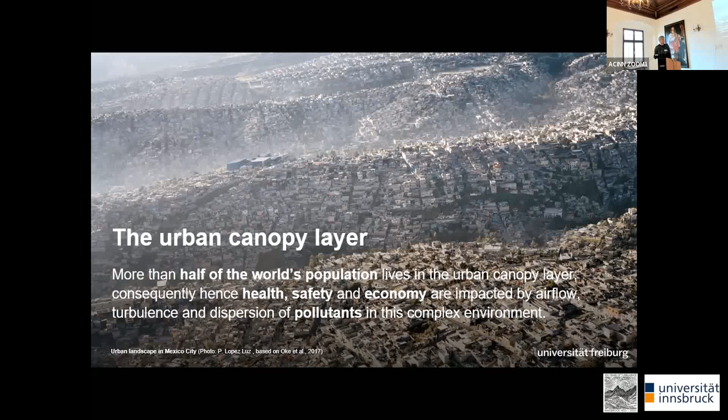I'll start with some general thoughts about the need for this research. It is clear that this is the place where we live - more than half of the world's population resides in cities. So the urban canopy layer has huge relevance for our everyday lives, for health, safety, and the economy of the world population. In particular, the dispersion of pollutants has gained a lot of attention in this context.

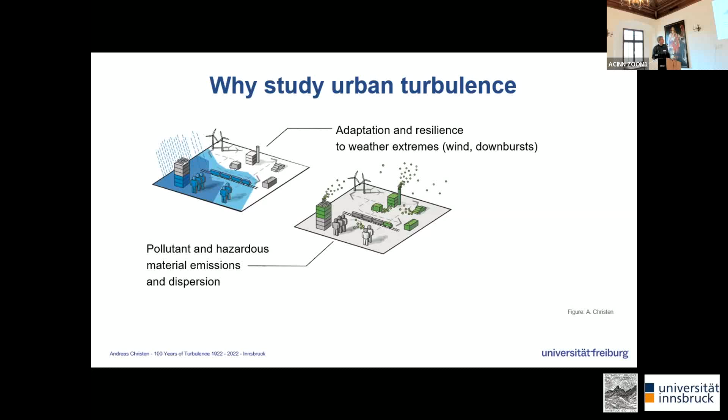But it's not only the pollutants. If we think about why we study urban turbulence in the canopy, we also have to work with weather forecasting - extreme events, winds, downbursts need to be forecast. It's not only long-term air pollutants, it's also release of dangerous materials, dispersion, but also more recently the dispersion of greenhouse gases if we want to measure greenhouse gas emissions from cities. And less relevant but still quite important is the aspect of renewable energies.

I'm not talking about bringing wind turbines into the city, I'm more talking about the energy of buildings. Marco Giometto, for example, showed that trees in the city lower wind and pressure fluctuations, and that translates to significant energy savings as well. So if we want to move towards energy conservative or energy reducing cities, we also need to think about wind.

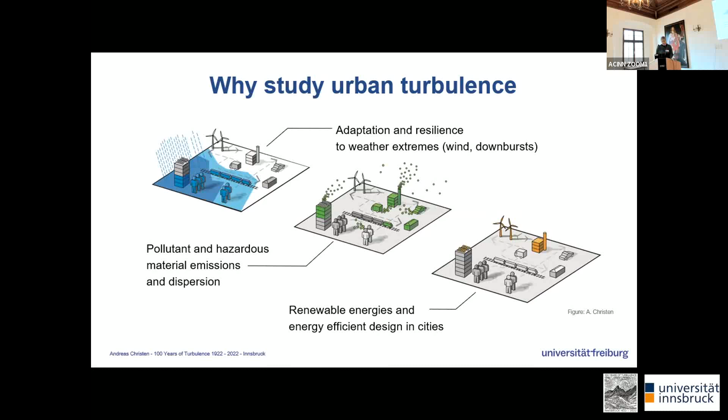A few pictures at the beginning to illustrate some particular effects we see in cities - a wonderful picture of flow over buildings. Unlike vegetation, buildings are not permeable, they are not moving in the wind, and they are very sharp edged. That means the pressure perturbations, which Ned also talked about in the averaging, are even much larger, and that changes the airflow and the turbulence, particularly in the wakes.

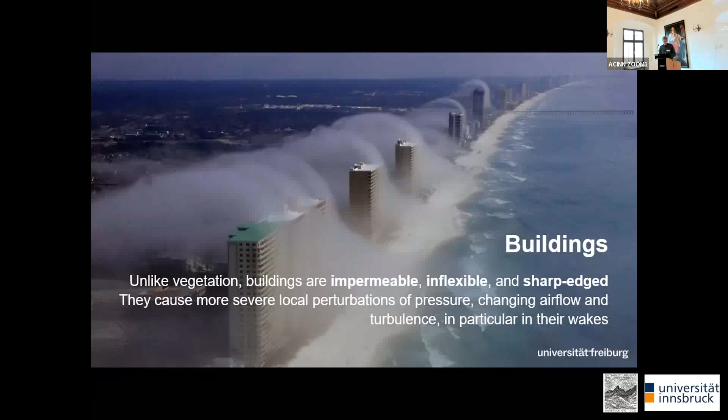But that's not the only complication. If we contrast that also to vegetation canopies, the volume occupied by buildings is substantial. If you're here in downtown Innsbruck, probably more than 50% of the space is occupied by buildings. So indoor air is decoupled from the outdoor, and the outdoor air volume decreases as we go down into a canopy, and we have to account for that in equations.

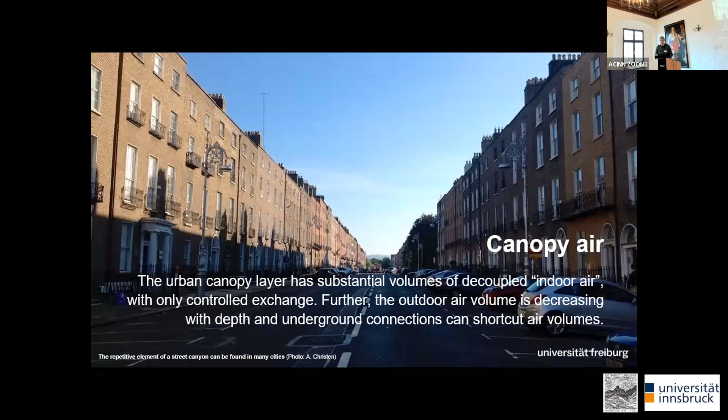Another specific aspect is the location of heat. In flat terrain, heat sources are uniform at the surface. In a forest canopy, one could argue it is the canopy top, but in a city this is greatly human influenced - there are huge emissions from chimneys and venting systems that are controlled in their timing and location by human decisions. And we, of course, can also alter this.

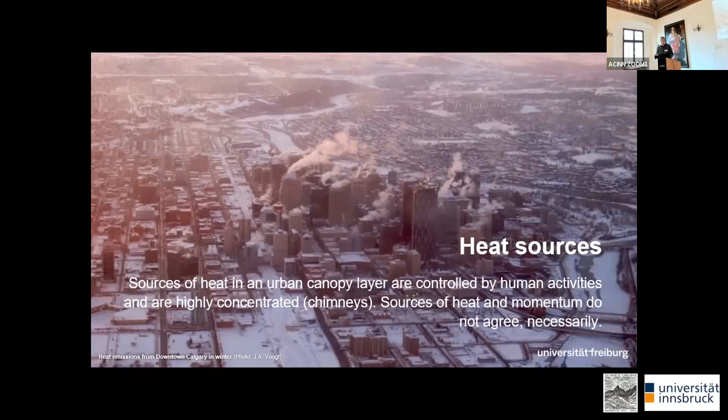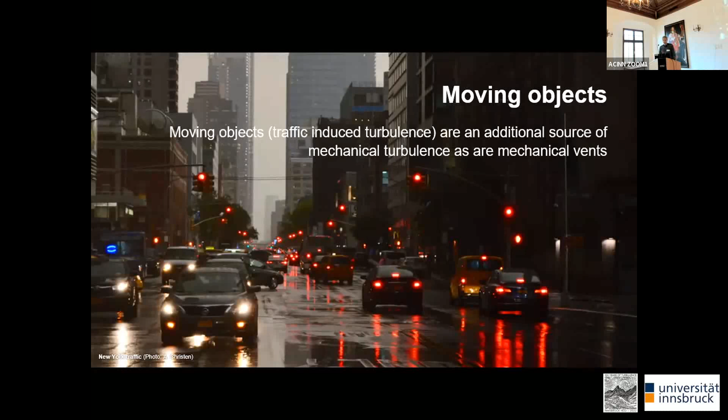Finally, I won't talk a lot about this, but it's an interesting side aspect - particularly if we go deep into street canyons where emissions occur, there are also moving objects. So the airflow is affected by those moving objects, and there have been a couple of studies looking at traffic-induced turbulence. That is something that's sometimes relevant.

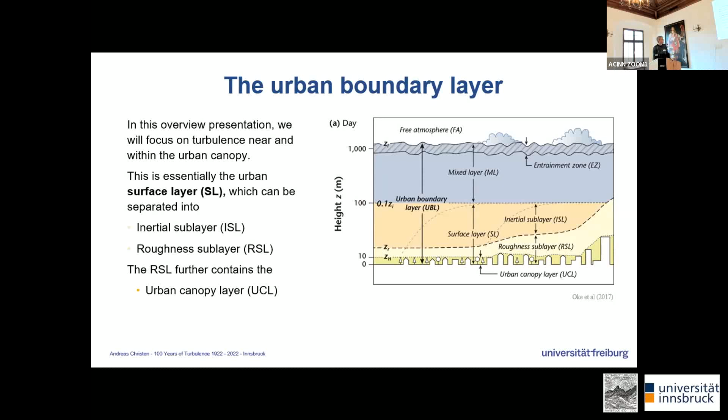So some of the dispersion models will clearly fail. Now, within the roughness sublayer, we also have the urban canopy layer, usually defined as the area from the top of the buildings down, and that's where most of us live.

Very quickly, the early work on urban turbulence mostly focused on isolated buildings and came from an engineering perspective. Without going too much into the details, airflow around isolated buildings is fairly well understood, even though it looks chaotic at first.

There has been lots of wind tunnel studies and also numerical work on some of the nice features, such as the horseshoe vortex that develops around an obstacle, which can also be seen here in Tim Oke's textbook.

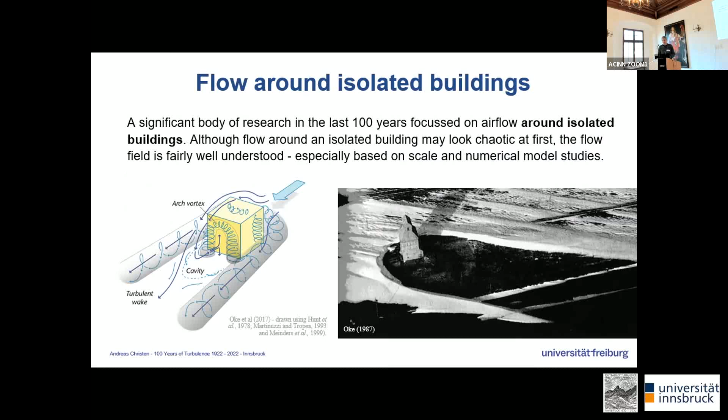Instead of focusing on those isolated buildings, a large body of work was looking at the spaces in between in cities. If there are buildings, there's also space between buildings, and this space is usually occupied, in most cultures, by streets where people move or drive and where emissions occur.

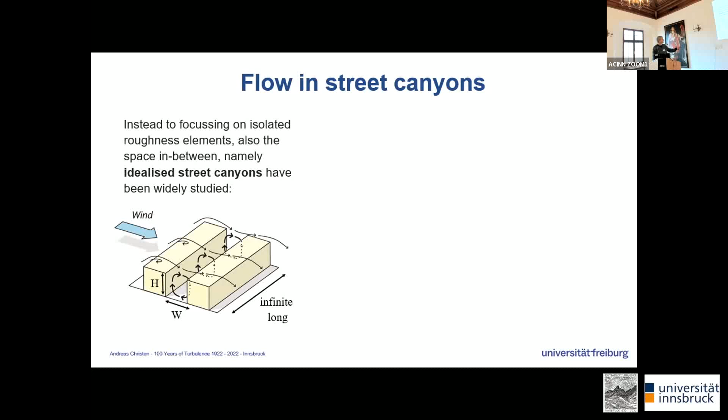So another approach is to look at street canyons as an element that's repeating over cities. Studies try to relate few length scales, for example the height of the buildings to the width of the canyon, usually studying infinite long canyons to make things easy in relation to wind and stabilities, and how this affects the venting of pollutants.

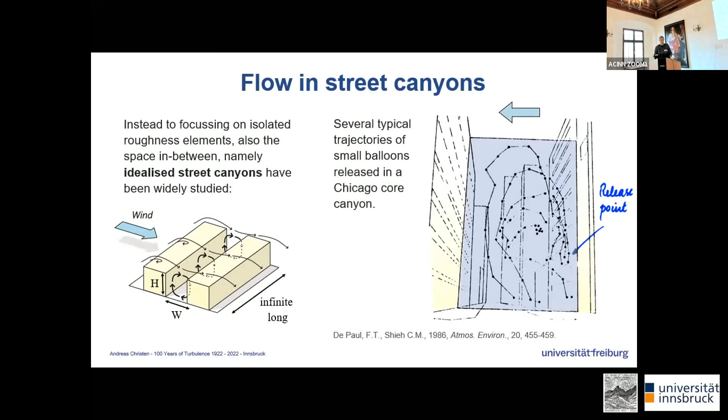That changes with the direction of the approaching flow. I'll show some more recent simulations that Marco Giometto has done for part of Basel with large eddy simulations, and although this is a complex canopy, you see some of those features.

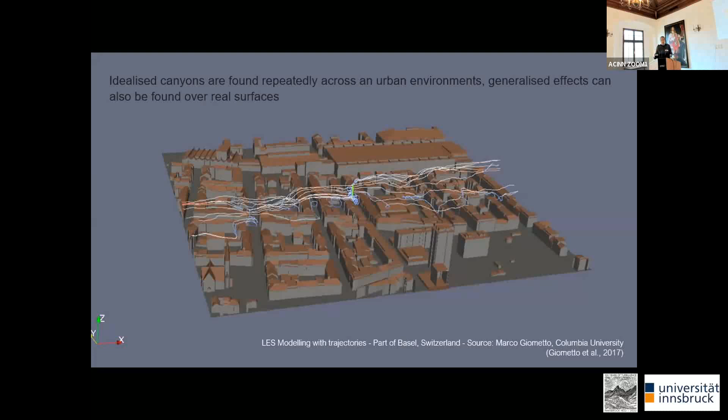So those are trajectories, and you see some of those looping movements found over and over again. So there was research on how we can parameterize this in models - how long they stay in a canyon, which of course relates to the situation.

Summarizing this work on individual elements - a city, as the last picture has shown, is more than the sum of its buildings or canyons. We really need to look at the urban scale flow interactions.

We have to deal with a realistic geometry, which is far more complex than in a forest. We cannot use one-dimensional approaches - there are many scales and degrees of freedom. It's challenging to study because we cannot measure everywhere, every place, no universality. How can we classify those surfaces?

So what the field has done, going back again to simple surfaces, is first study idealized geometries - cubical building arrays - with limited degrees of freedom, and try to figure out if we can find universal scalings in terms of spacing and density of those arrays.

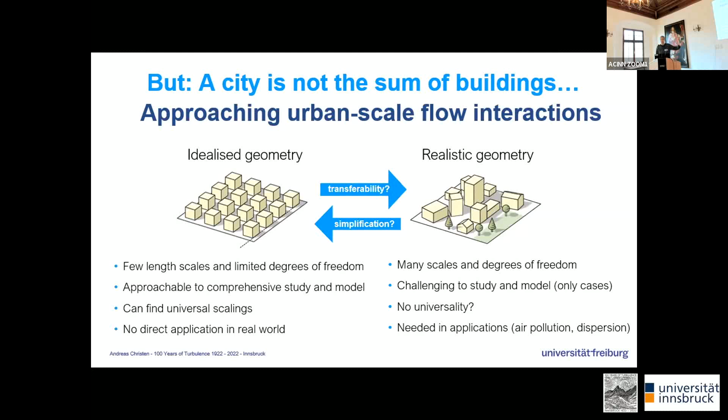Of course, the question the community has driven for a long time is: how transferable is that from a practical perspective back to reality? But I don't think it's a bad idea to make the system simpler and try to identify the most important scalings.

That leads me to a more practical part of research that was done in the last, I'd say, 50 years, looking at urban dispersion - from a health aspect perspective, from an air pollution perspective, and also for planning response actions or assessing risks, emissions from power plants or accidental releases.

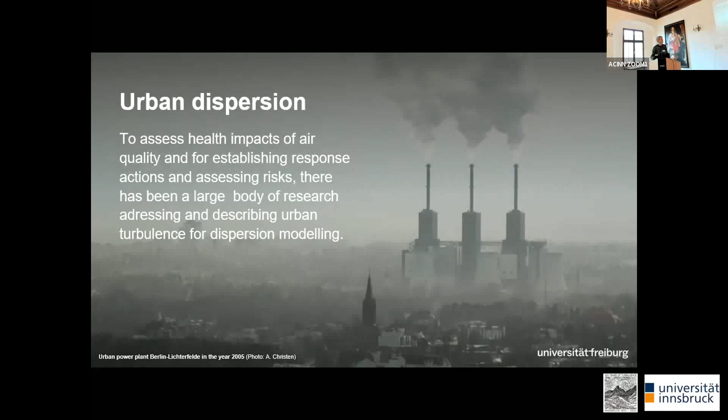A large body of research simply needs to know where a cloud of something that's been released goes and how quickly it disperses, without actually knowing too much about the underlying physics. It's good if we know something about it, but it's very practical engineering work.

Some early approaches used idealized obstacle arrays. These are some videos I was able to digitize from work done in the UK in the 1980s, where we have different arrays.

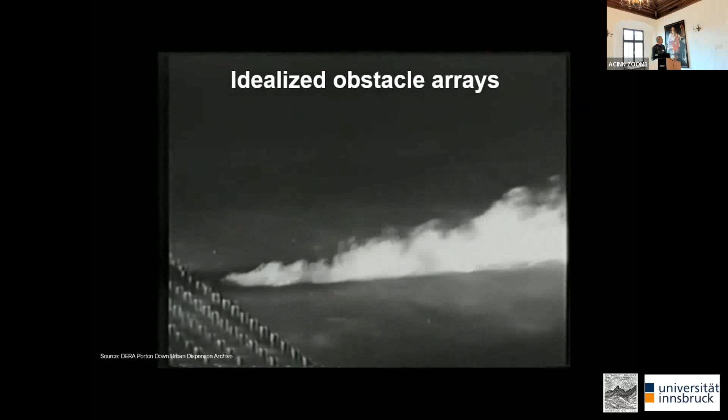So in wind tunnel simulations, you release smoke and then implement different roughness elements of different densities, and you see how this affects the flow.

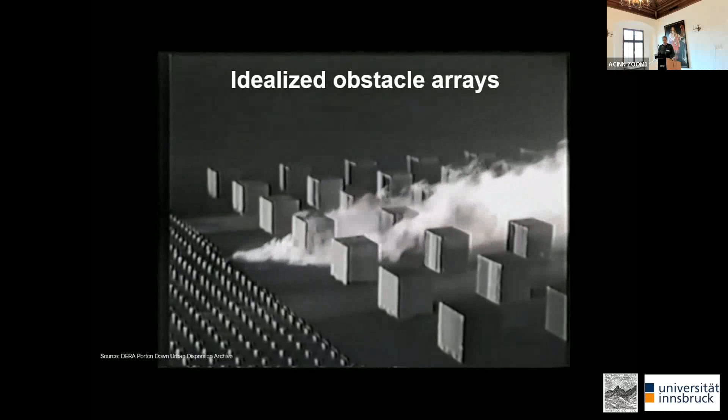First of all, the vertical mixing - the vertical transfer - is much larger, but also how is this affecting the lateral transfer? As you can imagine, in a wind tunnel, you increase the density more and more, and from those visual and measurement perspectives derive some general relationships.

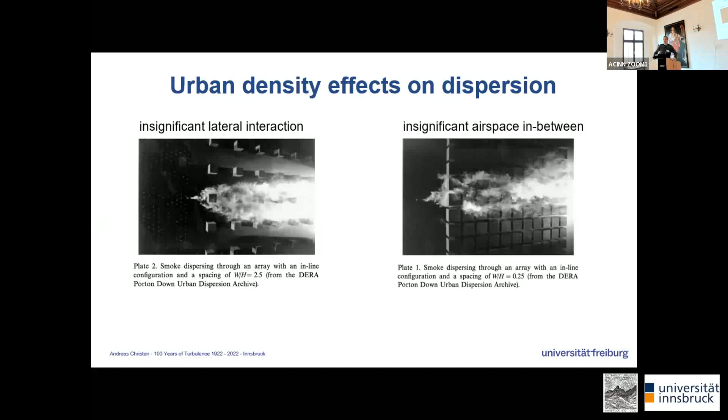One thing found in this work is if the elements are too far apart, there is no significant lateral interaction. The buildings will affect the flow but won't interact with each other. At the opposite extreme, if buildings are too close together, there is no airspace where dispersion can happen, and everything happens above roof level.

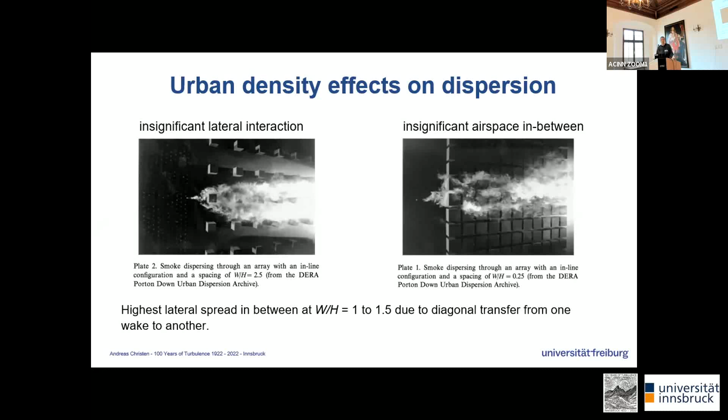So somewhere in between, there is the highest lateral spread, and that has practical implications for how we design cities, because we want to promote dispersion. Dilution is not the solution to air pollution, but it is one way of managing it. Of course, we have to tackle things at the emission scale.

This work led to the recognition that there are different flow regimes. These can be described by individual roughness elements and the flow around a building, where the flow is readjusted to the conditions upstream before the next element is encountered. That would be isolated roughness flow. It's not really relevant for cities because usually buildings are closer, but in some cases that's the case.

Then we have wake interference flow, where the wake of one building really impacts the next building, causing a lot of mixing and lateral spread. And then, if the buildings are even closer, the space in between becomes enclosed and increasingly decoupled from above. From an air pollution perspective, that's not a situation we would like to favor.

But that's not the only thing. It might suggest it's only about density, but it also depends on the alignment. Studies have been done with staggered arrays versus aligned arrays, and if you change the height of the buildings to being more random, that has a great influence.

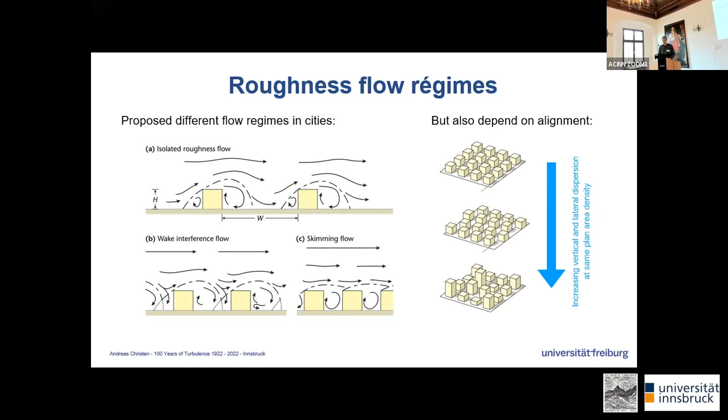This should indicate that as we move from one configuration to another, the vertical and lateral dispersion is increased, but also that with those simple arrays, we cannot just guide society in terms of how to build cities.

Reality check: how can we see whether those dispersion aspects are fulfilled? One option is to use tracer studies, which are more realistic compared to doing measurements of the three-dimensional flow everywhere. Early on, such urban tracer studies were done, traceable back to the 1950s even.

Not much is known about those, because some of this data is still classified or not released, since it was linked to the question of how biological agents disperse in cities, and how this could be used for warfare. Same in St. Louis—interesting, they also used some ugly substances at the time, released in cities, for example cadmium particles, which we would no longer use today to look at dispersion in cities.

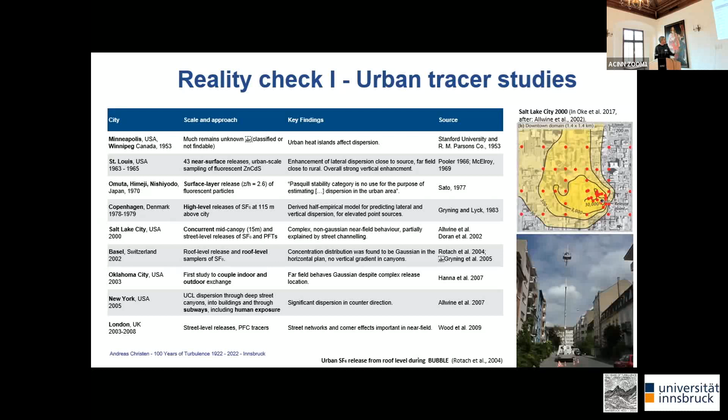Those experiments increased in complexity. There were some high-level releases from Sven Erik Gryning's group at, let's say, 115 meters above a city, and then progressively moved into the canopy layer. Also interesting, some coupling of outdoor and indoor space, because from a practical perspective that is relevant, as is tracking human exposure or dispersion in subways.

The other option we have more recently is, of course, to use building-resolved models to look at those effects. This was studied by Scott Salesky from Oklahoma University, who modeled the dispersion of a point source in a residential area and looked at the effect, for example, of trees—essentially mixing what we heard before, canopies with the bluff bodies, and how this affects dispersion.

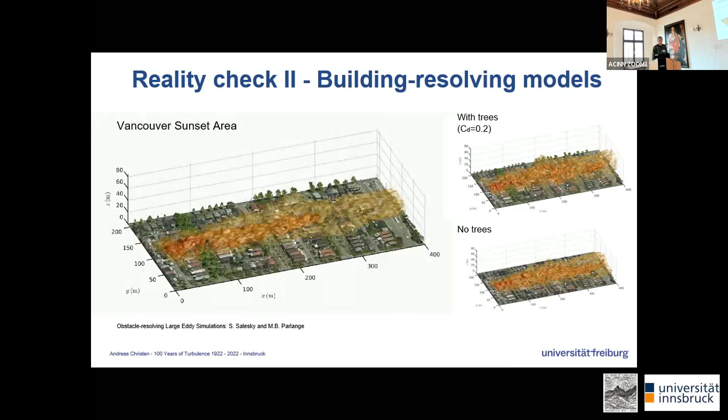Now, nevertheless, in many applications that are more of a fundamental nature—meaning more in numerical weather prediction, and more recently in climate modeling—we need to reduce the canopies to a simpler, one-dimensional approach, essentially only looking at how things change from the surface as we go up in the atmosphere. Only the vertical exchange needs to be considered in a simple way.

Interestingly, that has been done more than 100 years ago. Matthias Roth points to this in his overview paper: measurements on the Eiffel Tower in Paris were done in the 1910s and 20s, and they found that the transfer of heat, by looking just at profiles, was more efficient in the city compared to outside the city.

In some applications, we want to move away from a true three-dimensional field of turbulence into something one-dimensional, where things change by layers. So essentially the spatial averaging operator introduced earlier gives us changing wind or turbulence properties with height. In other applications, we don't care about detailed vertical turbulence, and we just need to look at the exchange.

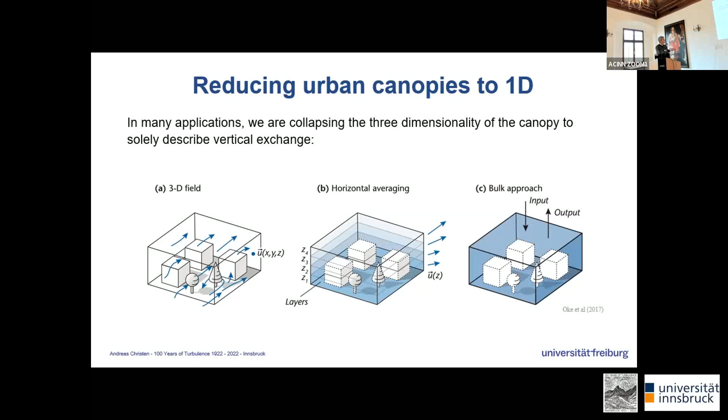I will mostly focus on this case here, because that's interesting to this community. Some models have been developed to accommodate urban forecast air pollution and heat exchanges. They can be classified into bulk approaches where we don't care about the vertical situation, single layer models where we have a canopy space and some above-roof temperature, and multi-layer approaches where we have spatially averaged properties with height in a canopy, which is most interesting for the work we do here.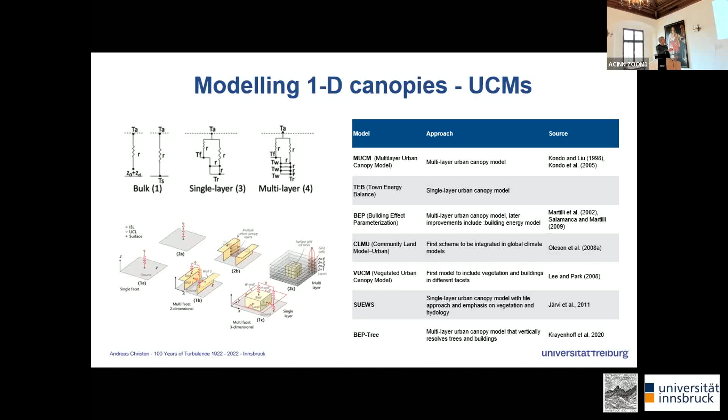I just list some of those here. One important model is the BEP model, probably the first multi-layer urban canopy model, which recently also included vegetation effects in the community.

Because I'm an observationalist and mostly work with measurement data, I thought I'd show some pictures as well from early approaches, something Tim Oke gave me. It's funny how they climbed the tower. That's Douw Steyn from the University of British Columbia at the time, being a student.

Interesting systems here too: there was a Bowen ratio apparatus mounted on this urban tower in this area of Vancouver, Canada, where they tried to look at differences of temperature and humidity to assess the energy balance. It never worked nicely, actually, because the differences were too small due to the large scale turbulent motions.

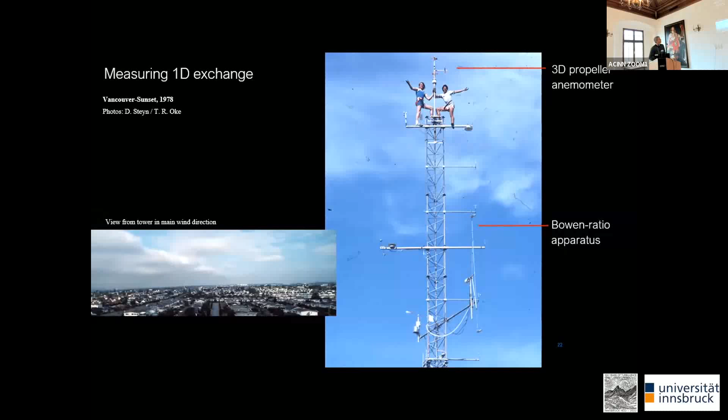Also interesting, the first work not using sonic anemometry, but 3D propeller anemometers on top. This famous tower is the work of Mathias Rotach in Zurich, established on this pedestrian bridge here.

Matthias, in a very intelligent way, had only about 2 sonics available and switched them to different locations. He could show that Reynolds stress is height dependent in this vertical part, and the assumption of a constant flux layer is violated. But he could also show that local scaling, proposed in other contexts, can be applied to cities.

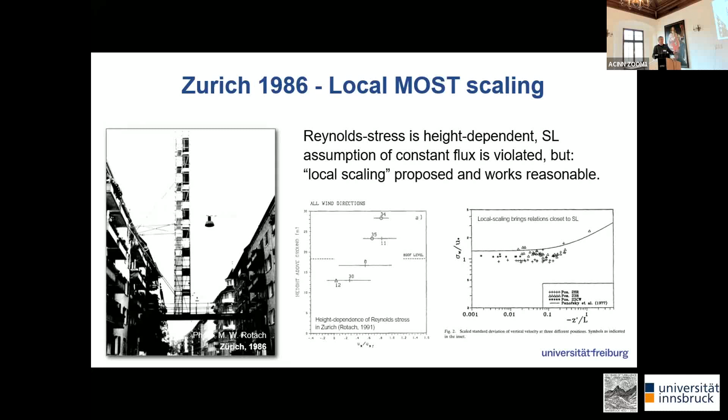Here is an example of a similarity relationship, sigma W over U star, not using the U star locally but the U star from the top — it doesn't match as well. But if you think about it, U star changes locally as you go down to the canopy. Applying that to the measurements, it gets definitely better, and you come closer to the expected relation. So that was essentially an opening to look at local scaling approaches that could work.

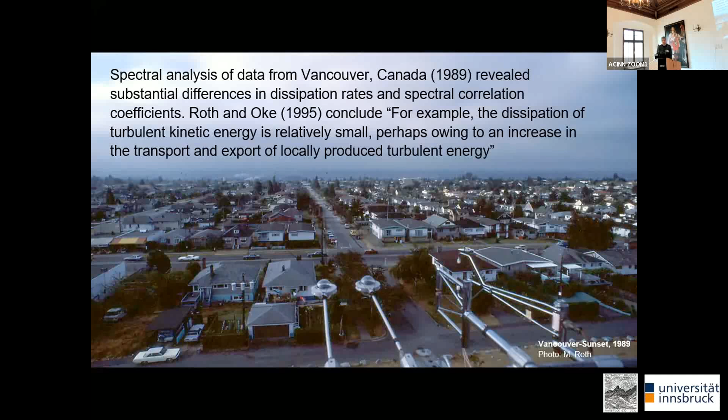Also similar, at the same time in Vancouver, Canada, Swiss colleague Matthias Roth and Tim Oke did spectral measurements of turbulence on the tower, and found that dissipation of turbulent kinetic energy is relatively small looking at the inertial subrange. What's interesting is that at the time they speculated this is perhaps an increase in the transport term that Ned already mentioned, and I will show that this is most likely the case.

Research also went on to tall towers. This is a nearly 100-meter tower in the city of Basel, where Christian Feigenwinter equipped 3 levels of sonic anemometry and essentially tried to use local scaling.

He was also inspired by work done in plant canopies and applied conditional sampling techniques, showing that large coherent structures affect the exchange. In this study, about 70% of the momentum exchange and 90% of the heat exchange at the lowest level was attributable to those coherent structures. The influence decreased higher up, to about 50% momentum and 70% heat.

We then followed up in 2002 with the BUBBLE campaign, also in the city of Basel, led by Matthias, where I did my PhD. We had the luxury of having 3 towers at the same time, in different densities and different configurations.

All 3 towers also have measurements over 1 year. And it was mentioned yesterday that having long-term data sets, not just a couple of days but at least a year long, is very valuable. And I can definitely say that, because you can really find more exotic situations.

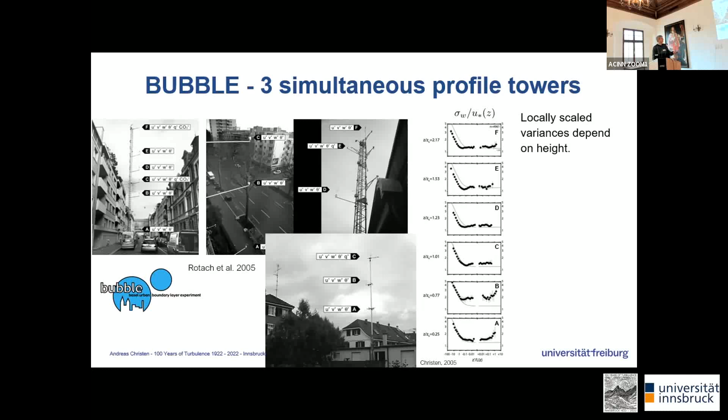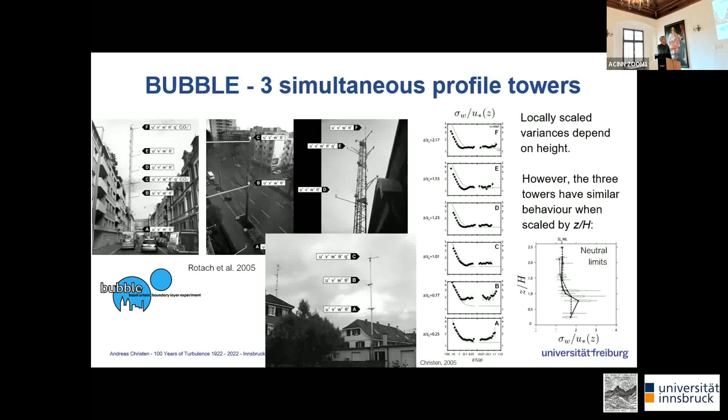So the local scaling variances greatly depend on height. Now we could say okay, let's give up, or let's hand over the data to Ivana for looking at new approaches. But also, what was nice in the Basel data set is that we had 3 towers. And if we put together the 3 towers, it's not just random that they fluctuate higher and lower. For example, if you look at the neutral limits of sigma W over U star, they change similarly at the 3 towers.

I tried to explain this with the turbulent kinetic energy budget at the time. If we assume local scaling, we essentially assume a local closure, that the mechanical production—which includes wake production—and the thermal production is simply balanced by local dissipation. If we do this, it doesn't look bad, but essentially we don't balance this.

And if we add the non-local closure terms, we can measure the triple correlations. That's also a need for long-term data, to essentially get rid of the noise. You can have a pressure transport, and that's similar to plant canopies. So essentially, the turbulent kinetic energy is transported up and down in the canopy from a region where there's most of the production.

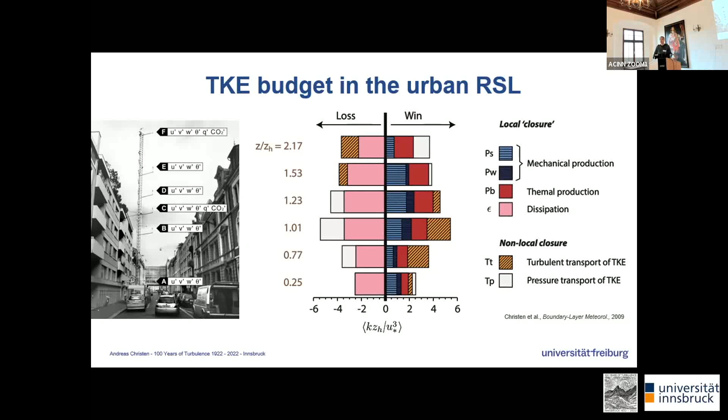Pressure transport we cannot measure, but we used it as a residual, and it indicates that it is essentially a loss, and it is a win up and down, which is also consistent with some of the large eddy simulations. So local scaling, I was arguing, is failing because we don't account for those additional terms. So the solution would be to go for higher order closures that account for those.

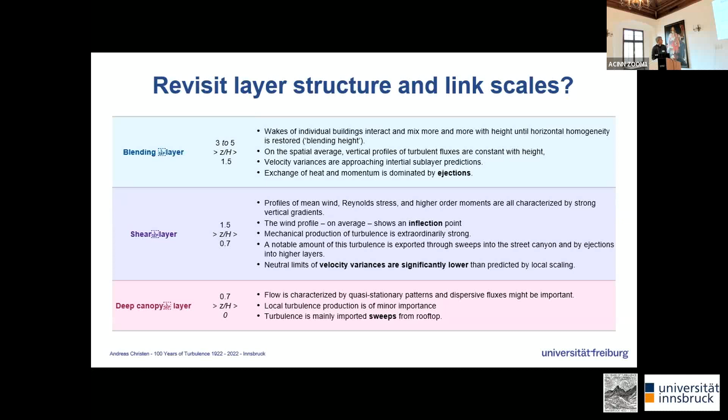Where we have the characteristic that the neutral limits of the velocity variances are significantly lower than predicted by local scaling. That means some of this is essentially exported and cannot be explained by local scaling. We also have an inflection point, and we have a layer—I'm not sure if we should call it a blending layer, because there are other definitions—where it goes into the surface layer, and we are dominated by ejections.

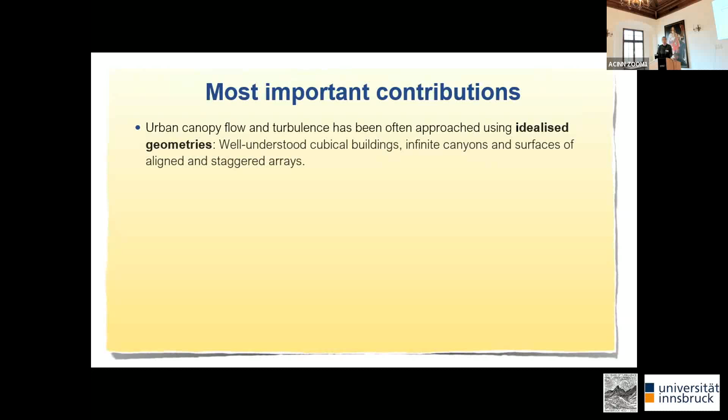So in summary, what were the most important contributions? The first part of my talk showed that the community has used idealized geometries: well understood cubical buildings, infinite canyons, surfaces of aligned and staggered arrays. And from this, a lot could be learned. But the question remains how transferable that is.

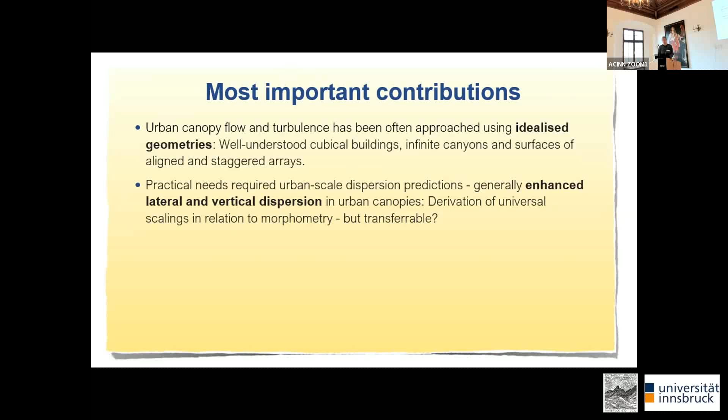Practical needs, on the other side, in the second part of my talk, showed that we need information on the lateral and also vertical dispersion in urban canopies for practical reasons. It's difficult to derive universal scalings in relation to morphometry—partially possible with the unified geometries, but is that transferable to the real world? And finally, in the last part, integral and one-dimensional horizontally averaged statistics show converging turbulence behavior.

We are seeing similarities across cities, across the globe. That's what I call the urban family, as opposed to the plant canopy picture that Mike Raupach has compiled. I want to make the point again: non-local processes dominate the transport of the roughness sublayer, quite similar to the vegetation canopy, although we don't have the mixing layer analogy in at least not all cases.

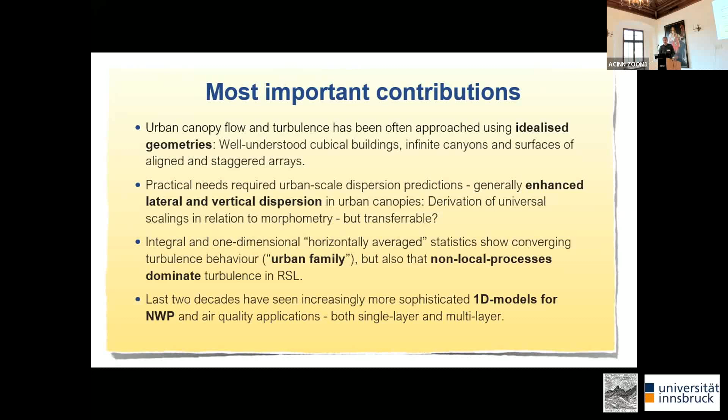Last decades have seen an increasing effort put into more sophisticated numerical weather prediction models. We are now able to model cities, and we need information on pollution concentrations and temperature at the level of cities. What are the open questions?

In cities, we also have dispersive stresses and fluxes, and I have said little about those. They possibly contribute even more compared to plant canopies, and some of the few studies that looked at it using LES or direct numerical simulations show they are important.

Volume averaging is actually something that is quite crucial. As I mentioned before, the fraction of buildings is increasing—in this case from one of the towers in Basel up to 50%. So how do you actually calculate vertical gradients if your volume is changing? There's a nice work by Manuel Schmid looking at those averaging procedures and what it means for our budget equations.

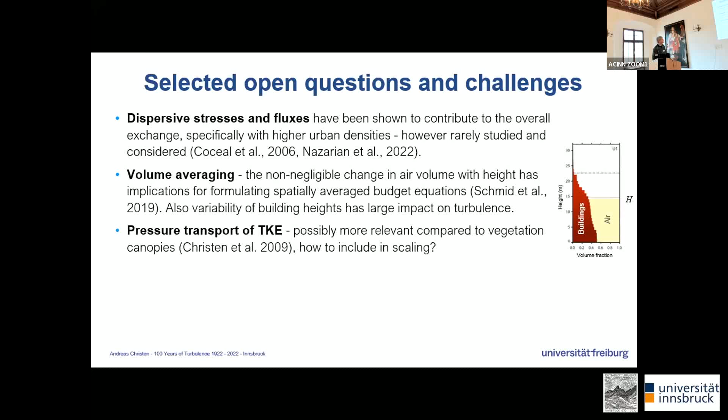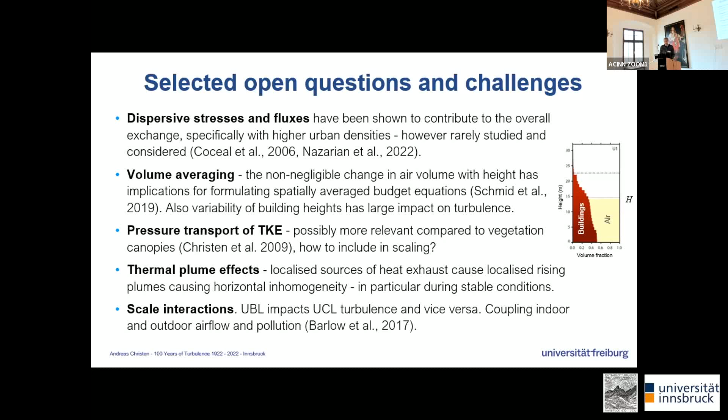Pressure transport, as I've shown, is possibly more relevant even compared to vegetation canopies. But how can we include that in scaling? How can we even do measurements of pressure transport? Thermal plume effects, as I showed on the image, where we have locations where heat is increased, and scale interactions are relevant.

Just three slides on some of the next steps. From a practical, modeling perspective first, we now have large eddy simulations that can't run in real time, but they can cover entire areas. They are still slow, so they cannot be used for forecasting. But some groups have moved them to GPU, and you can also apply machine learning approaches to large eddy simulations.

For example, in Freiburg we have an interesting project where Dirk Schindler, together with Marco Giometto, look at different neighborhoods. They model with LES, do a training, and then apply it to a test area that has not been trained before—that's over here with machine learning—and then compare it to large eddy simulations. That seems to be quite efficient from a practical perspective, and it has computing advantages: it's four orders of magnitude faster. So you can use that maybe in the future for dispersion modeling.

Now, from an experimental perspective, you asked me to say something about the ERC. We currently have an ERC running that looks at interactions of urban climatology across scales, all the way to the globe. And we really need to do observations as well across scales.

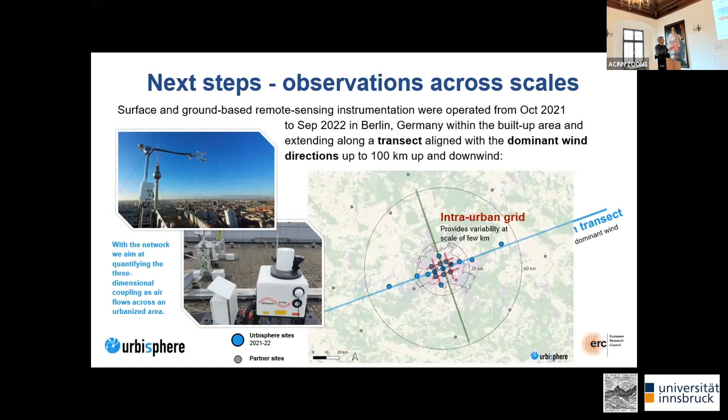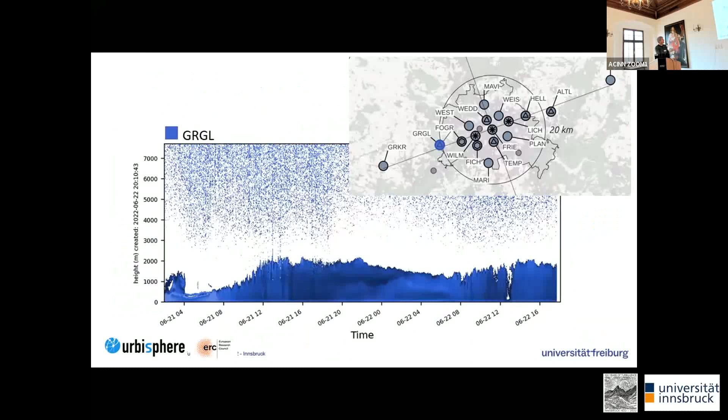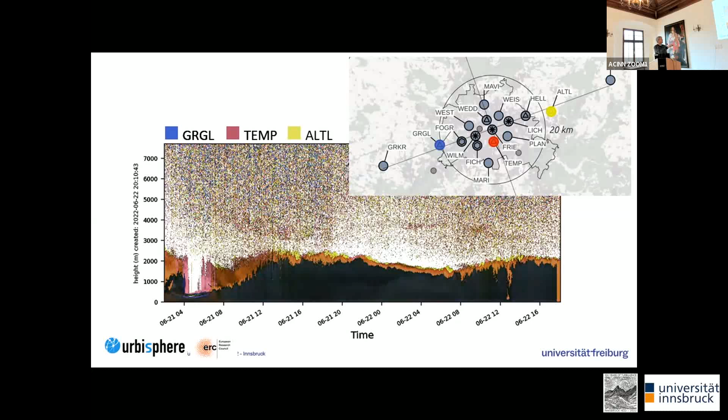If you take, for one day, boundary layer observations in the upwind area where the wind comes from the west at the fringe of the city, and contrast that to the city center, you see the boundary layer is higher over the city because there's more heat going in and more vertical mixing. Interestingly, if you go to the rural area downwind—that's the yellow one—it stays high. So we have urban plume effects that even go beyond the city. We cannot just study the city; we need to study the entire region in a model.

But what I wanted to show is also scaling up individual tower measurements. Those are tower locations in Berlin that were operated with path-average scintillometers.